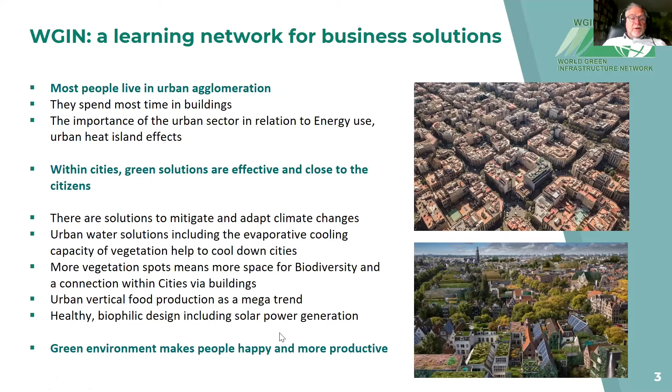Finally, healthy biophilic design, including solar power generation, is a point of our special interest, and we want to share this information. A green environment makes people happier and more productive - that's one of these points.

The global level is important, the local level of Europe is important, and defining it down to cities and solutions to the square meter scale in each city - this is a nice point. We are working in this field.

It is time to connect initiatives around the globe, for both the local and the global perspective. And the question of all ages - meaning the young chapter, the students, the practitioners - should be involved. On the European level, the renovation wave, how to build in the future, also eco-cities for post-war construction for Ukraine could be one important point hopefully in the near future.

On the level of cities, we have single solutions on buildings, fantastic examples also done by our corporate members in the last years. We are looking for more solutions for full neighborhoods or full cities. There are a lot of things ongoing on the level of the EU, and also the green cities movement somewhere.

Okay, I will share my screen here. Can you see? Okay, perfect. I am Emanuele Quaranta, I work at the Joint Research Centre of the European Commission. I work mainly in two topics related especially to water, in particular urban greening and nature-based solutions, and hydropower.

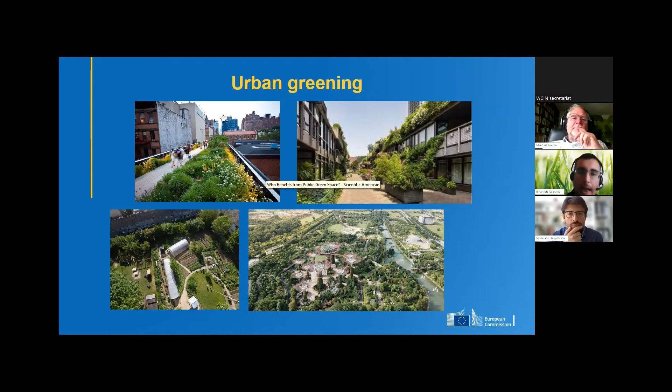Today I will speak about some results on urban greening. In general, urban greening means covering any impervious surface, vertical or horizontal, with a layer of soil and vegetation. Within urban greening, we have in particular green roofs. In the remainder of this presentation, by the word green roof, I mean not only covering with soil and vegetation a building roof, but any impervious surface - for example, also a road or a parking lot.

Green roofs have different benefits thanks to their different behaviors. First of all, green roofs have a hydrological behavior because they interact with precipitation - part of the water is retained inside the soil, then there is evapotranspiration, runoff - so they have this water balance, hydrological behavior. Then green roofs have also an energy behavior because they interact with solar radiation and generate evapotranspiration, which is another heat flux. And then they also have a biodiversity and biomass behavior because they allow vegetation to grow.

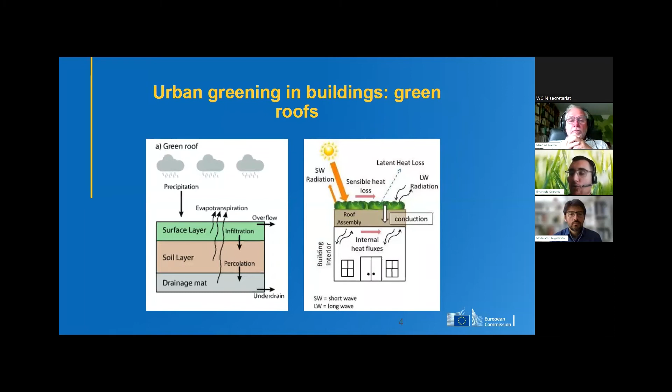They have different benefits. First of all, we can think of the reduction of the temperature of the air. This is very useful and important at the city scale because it allows us to reduce the heat island effect. Then there is thermal isolation of the building, especially in summer - this allows us to reduce cooling, and so also to reduce pollution and energy requirements.

Then blue water, so precipitation, is transformed into green water - water that remains inside the soil. This has an important benefit because it reduces the possibility of urban flooding. Biomass grows, with benefits for example on biodiversity and carbon sequestration from the atmosphere. Then additional other benefits, like acoustic isolation of the building, social activity such as gardening, or the increase in the property value of the building.

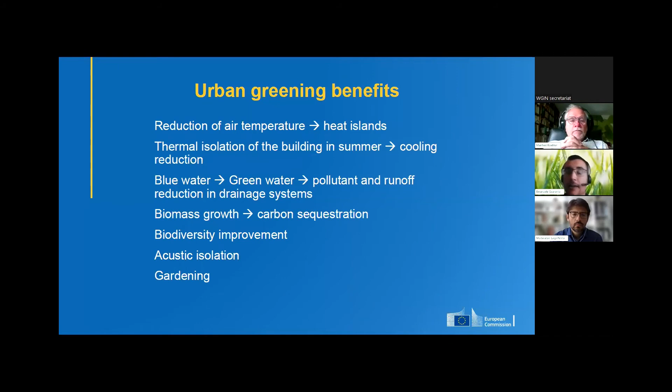So what we did in our studies: first of all, we quantified the benefit of urban greening at the European scale with a focus on green roofs, and then also investigated how much urban greening can mitigate combined sewer overflow. I will better show what combined sewer overflows are at the end of this presentation.

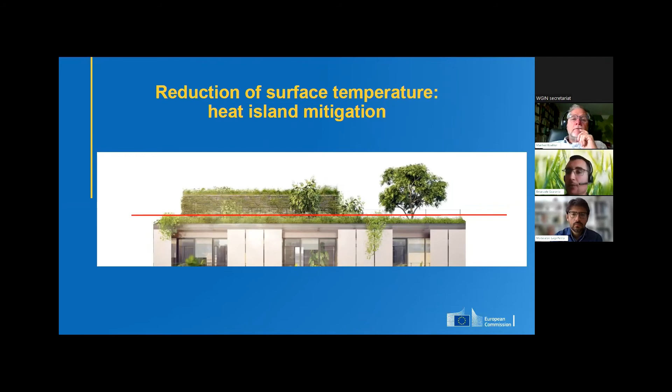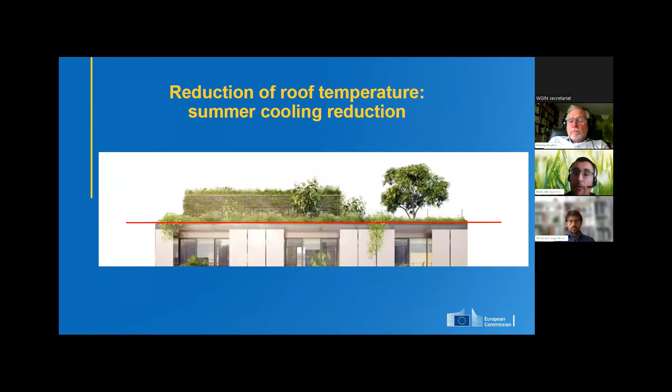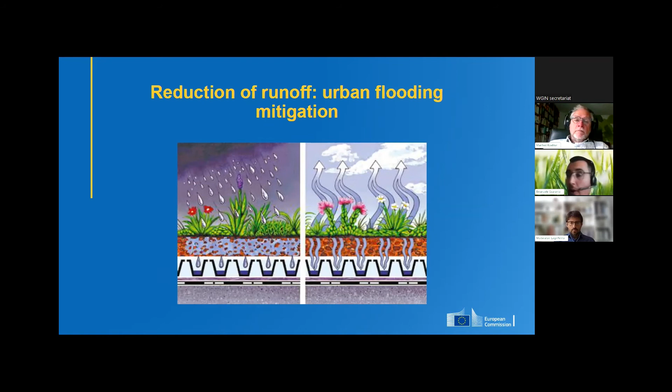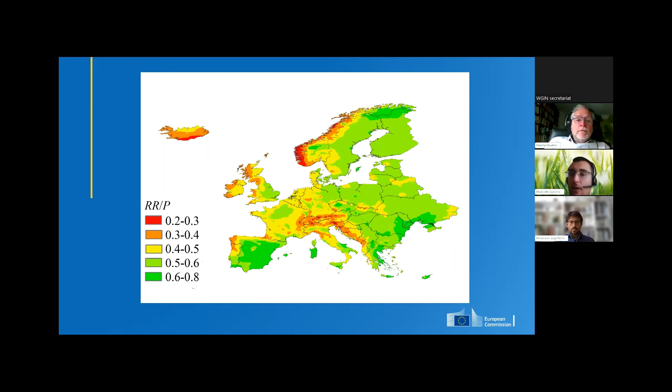Then there is another important benefit of green roof, which is the reduction of runoff, because part of the precipitation is retained inside the soil. Again, we have this map. Let's see, for example, Turin, it is yellow-green, so more or less 0.5, that means 50%. What does this mean? That 50% of the precipitation at the annual scale is retained inside the soil and evapotranspirated, so the load to the sewer network, to the streets, is reduced by 50%.

Then an additional benefit is the biomass growth. For example, we assume to grow a classical alfalfa vegetation, and again we draw this map. Let's see, again Turin, again yellow, more or less 2. This means that for any square meter of roof, there are 2 kilos of biomass that can grow every year.

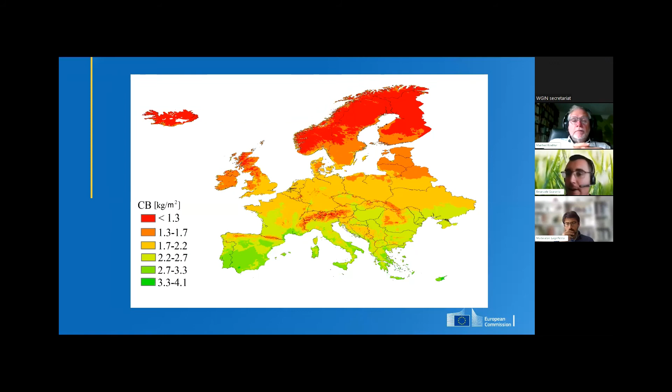So now we have derived this map, but it's possible to quantify this benefit in economic terms. I will not explain all the calculation, all the method now, but if you are interested, you can contact me. I will send you all the information and the related paper.

And in general, I will show in the next slide that the ratio of benefit to cost of green solution is one order of magnitude higher than classical gray solution.

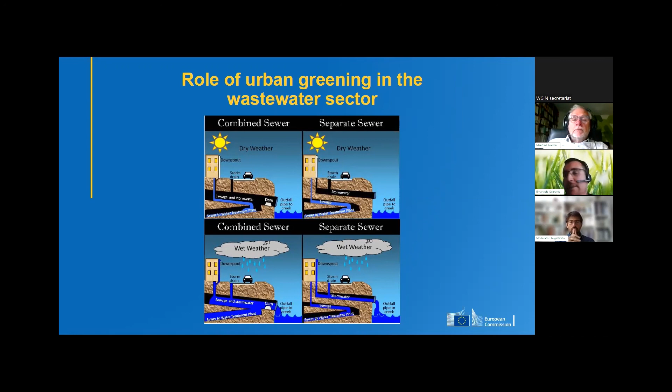And how can we do to reduce it? We have mainly two prevention strategies. The first is the use of urban greening, because urban greening retains precipitation, so the flow to this combined sewer reduces. Or we can also use gray solution. Gray solution, what means? Practically it means to increase the diameter of the pipe or to increase the volume of the tanks. We did some calculation.

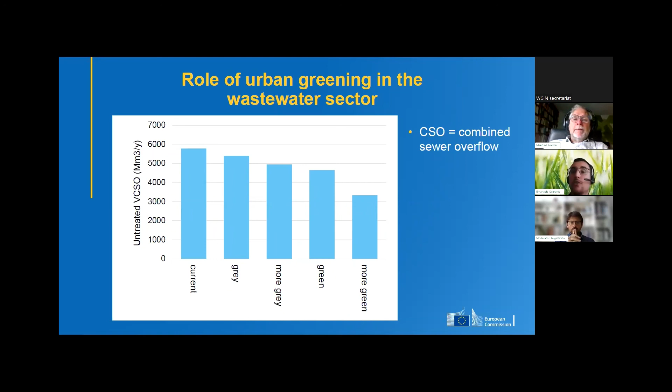If we refer to our baseline scenario, which is the current situation, more or less 6,000 million cubic meters per year are spilled inside the environment as precipitation plus wastewater during these combined sewer overflows. If we implement gray solution, we can obviously reduce them, but if we implement green solution, as you can see, the reduction is more important. And when we implement green solution, the ratio benefit to cost is one order of magnitude higher than gray solution, because greening has not only benefit in this context, but also a lot of other benefits in the reduction of temperature, in the increase in biodiversity, that generate a lot of other benefits. So it can attract investment from different fields.

Okay, so here I conclude my presentation.